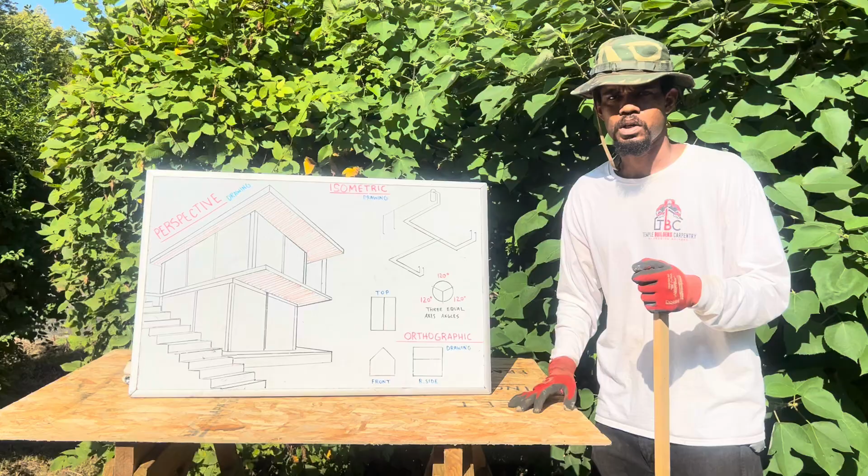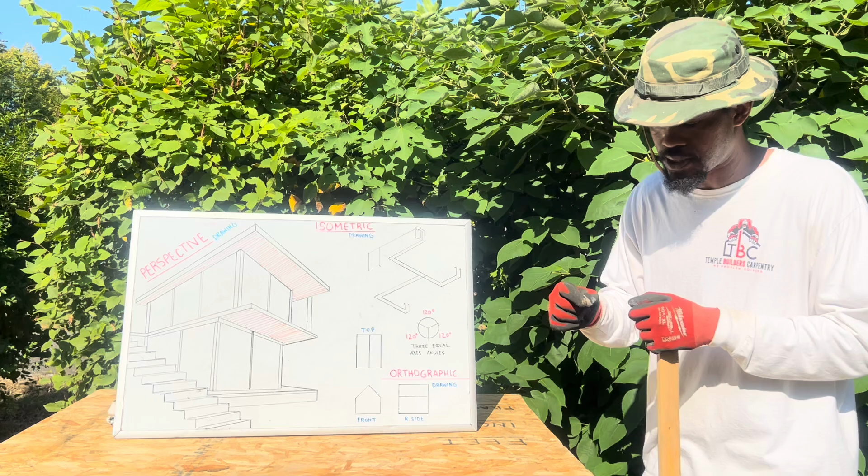Temple Builders, safety first. Okay, Temple Builders, today we're talking about how to read prints. Now, if you're a carpenter that knows how to read prints, this becomes a major advantage on the job site. I got some actual prints for us to read today, but before we do that, let's take a look at my whiteboard. I got 3 different styles of drawing that you need to know.

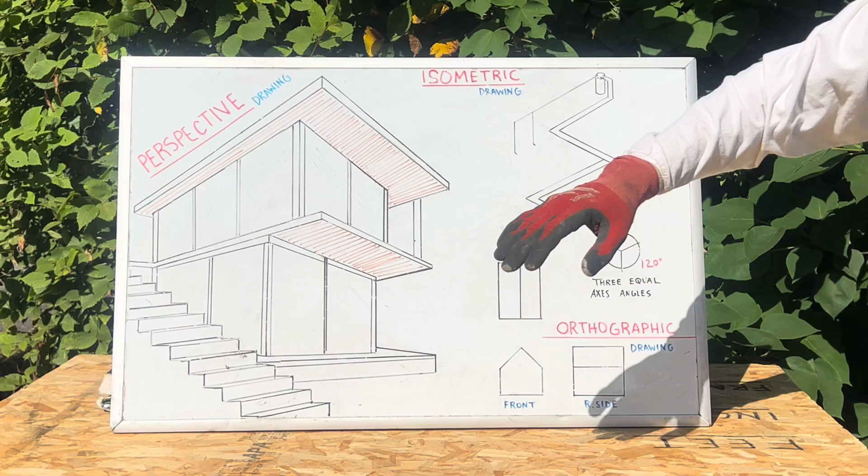One is perspective drawing. The other one is orthographic drawings. And right here we have isometric drawings. But let's first start with our perspective drawings. Now let's take a look at our modern home right here. It's drawn in a perspective drawing. This is our most realistic drawing. It's drawn from the person's viewpoint.

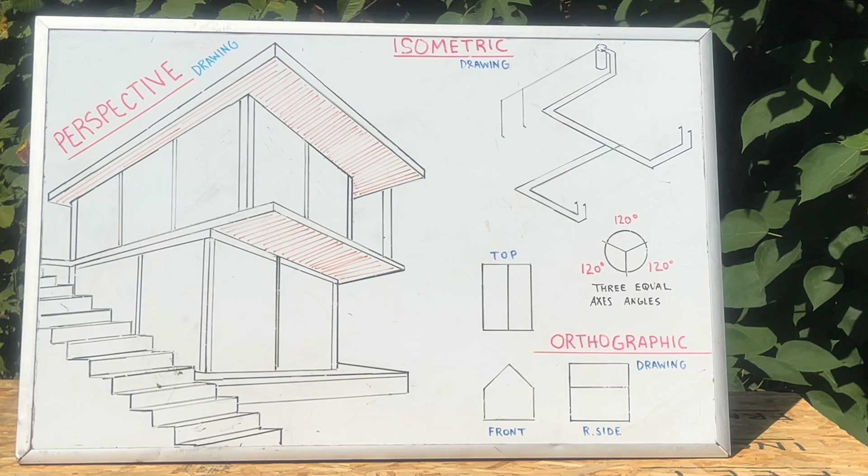Right here is our orthographic drawing. Now, orthographic drawing is also known as a multi-view drawing. A multi-view drawing is a drawing in which all faces of an object are projected onto a flat plane. In this example, we're looking at the front side of a home with a gable roof. Now, if we turn this house to the side, this is the right side of this same object. And right here is the top, looking down from a bird's eye view.

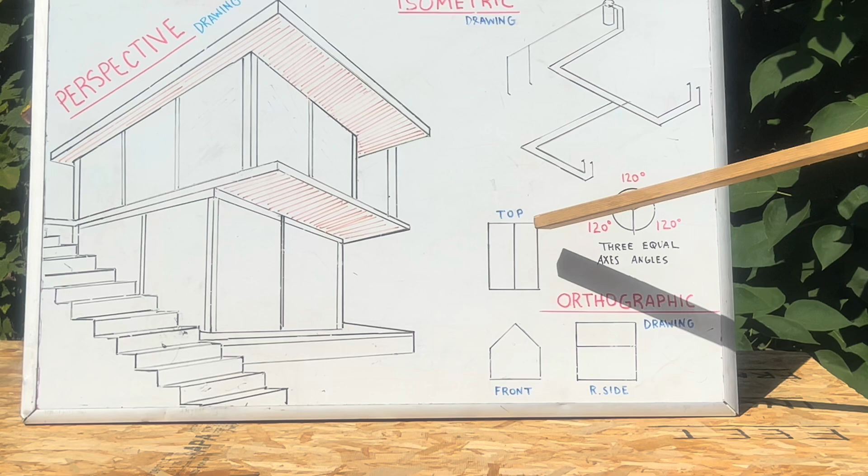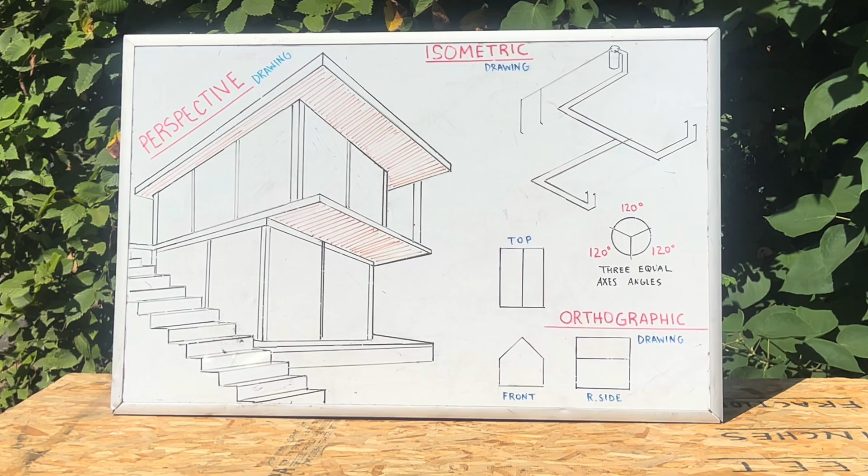Okay, right here is a water supply system, and it's drawn in an isometric drawing. An isometric drawing is a drawing in which the 3 principal axes are 120 degrees apart. Now, if you look right here at my circle, you can see 120 degrees, 120 degrees, and 120 degrees. That's 360 degrees. Right here it says 3 equal axes angles.

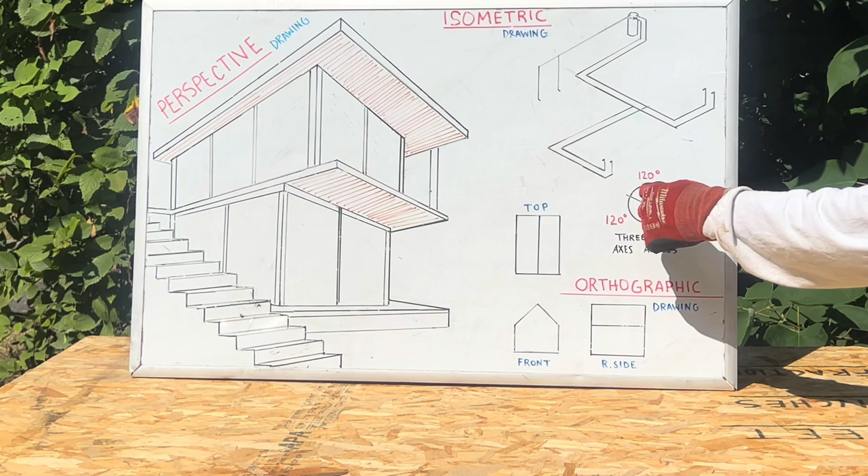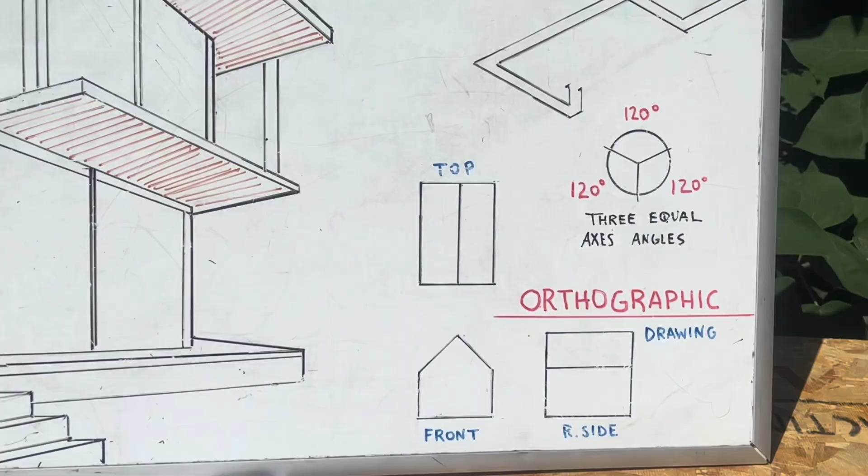So this line right here that's plumb, that's replicating right here. You see my lines right here that are plumb? Okay. Now 120 degrees right here, you see this line? It's replicating these lines right here. And this line is replicating these lines right here. Okay, simple as that. Let's move on. Now in this example of my gable home, I got the front, the right side, and the top.

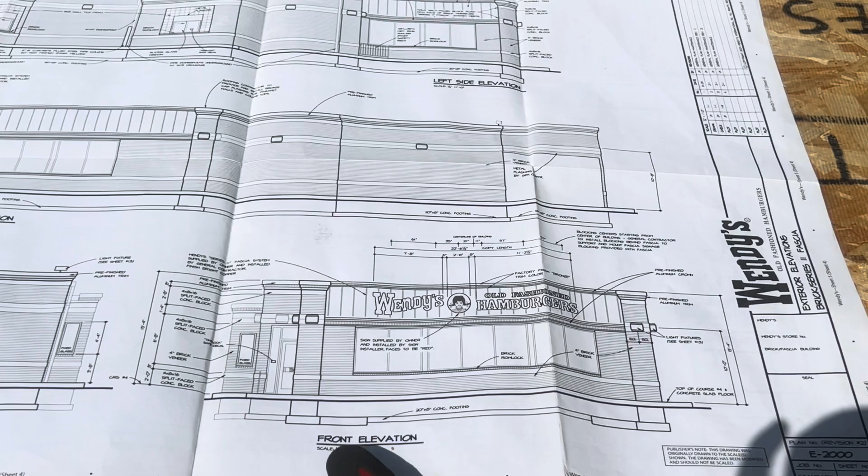Now, let's look at some real prints. Right here I have the Wendy's restaurant. Now it has exterior elevation. As you can see, right here we have front elevation, just like that was on our whiteboard. The scale is 1/4 inch equals 1 foot. Now if we look right here, here's the rear elevation. We're looking at the rear of this building of our Wendy's restaurant. Right here is the right side elevation, and also we have the left side elevation.

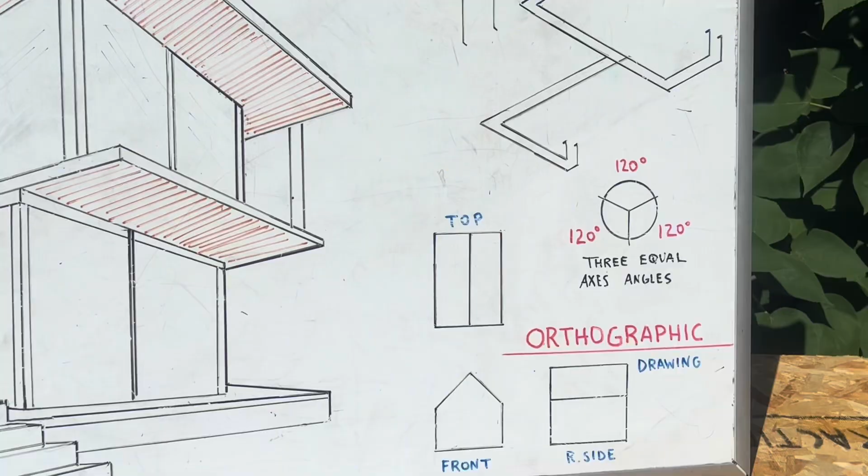Now, just like in our whiteboard example of our orthographic drawing, we got a viewpoint right here from the top. Now let's look at our Wendy's prints. This is a floor plan, okay? That's what your view is called from the top. It's called a plan view when you're looking at it from a bird's eye view, okay?

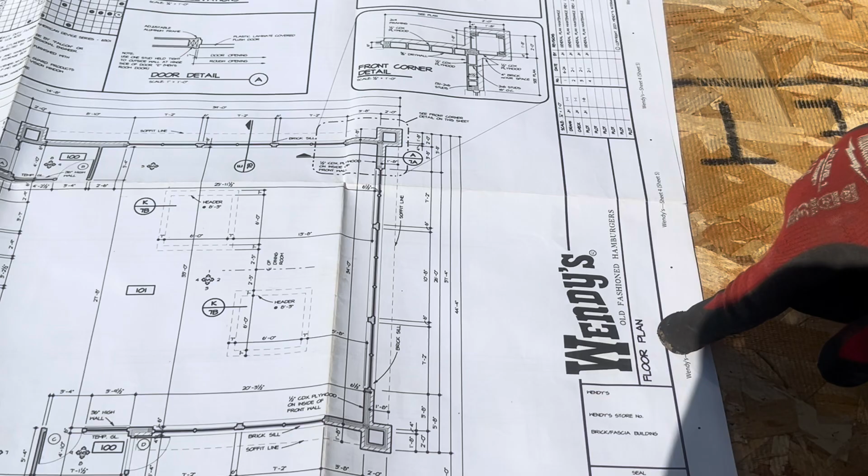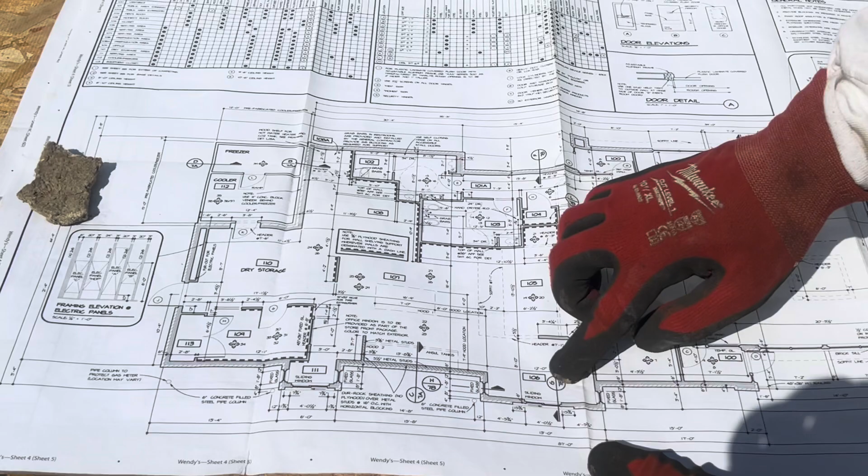So I'm looking at the floor from a bird's eye view, because basically from the ground up to about 3 or 4 feet, the rest of the building is taken off, lifted off like a dollhouse. And now I can look down into my building. That's why it's called a floor plan. And look, we can see on this floor plan we got a sliding window right here. Going down here, we got a sliding window right here. We're gonna go over this more later. We're just going over the basics right now.

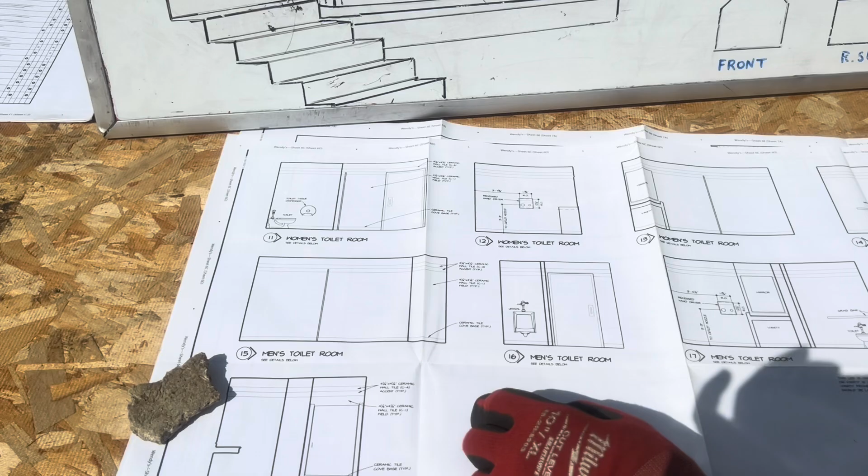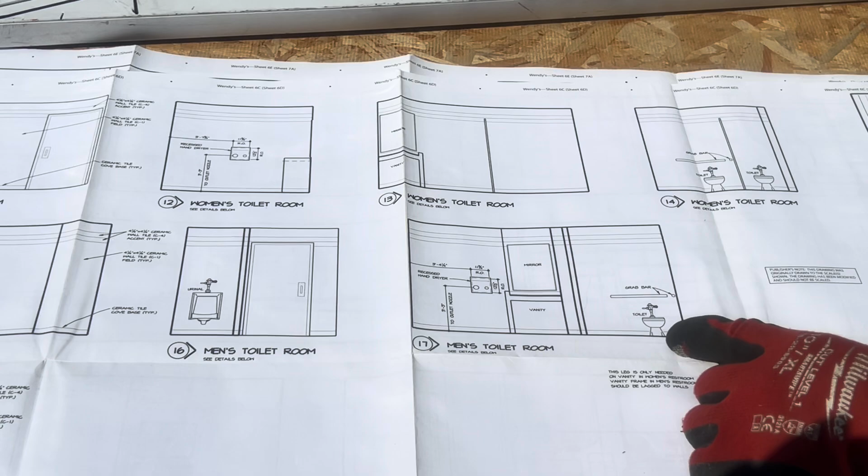As you can see right here, we're looking at the interior elevation / restrooms. Now let's take a look up here. At 11:15, we have our women's toilet restroom, and right here we have our men's toilet restroom. These are detailed drawings. We can see right here we have a urinal. It's the men's toilet restroom. And also in the men's toilet room, we have a recessed hand dryer, and we have a toilet and grab bar. Okay, so I'm just going over some of the basics.